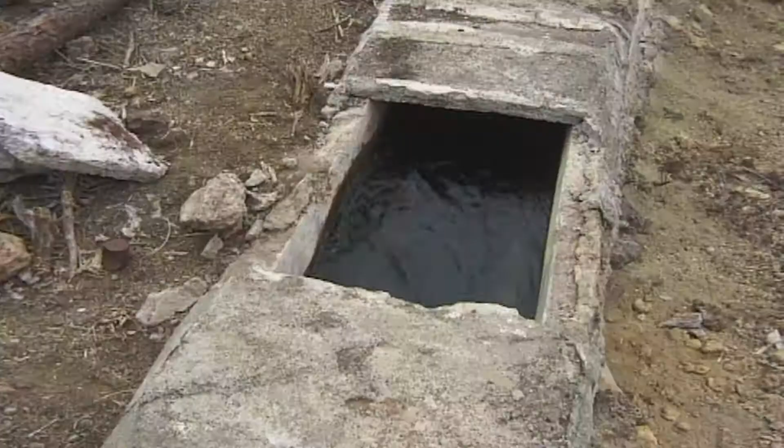Such transfers, necessary in order to guarantee the supply, have traditionally been accomplished via totally or partially covered channels. The risk entailed by this system has led the Island Water Board to foment the creation of a network specialised in the conveyance of urban water supplies, substituting the channels with closed conduits.

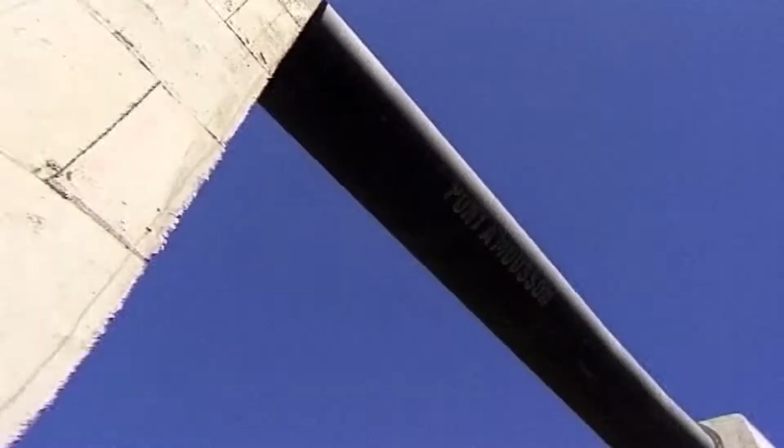The use of pipelines represents greater sanitary safety and, at the same time, allows the introduction of technical improvements such as remote monitoring and control.

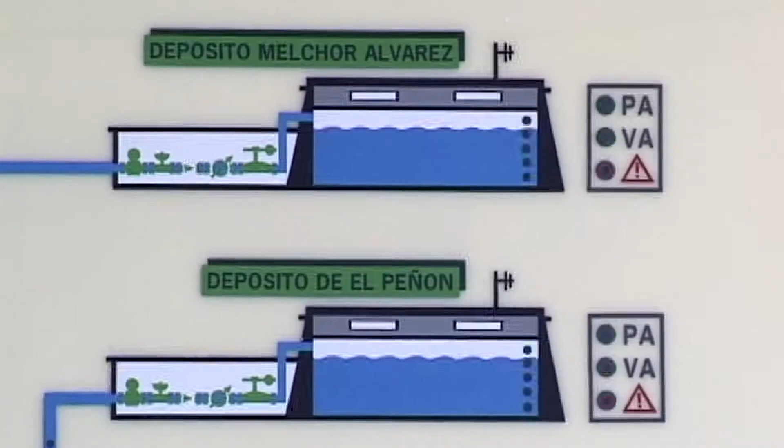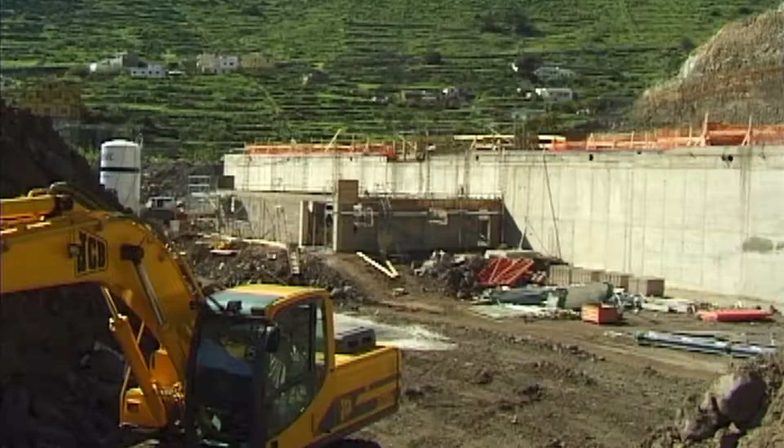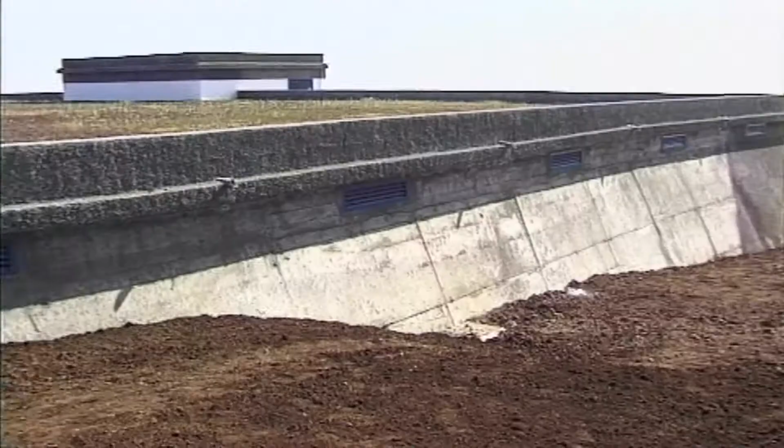The hydrological plan contemplates the construction of a sufficient number of holding reservoirs to guarantee the water supply to the population. They have been designed to hold 1 cubic metre per inhabitant so that, in the case of upstream interruption, a week's supply is assured. The reservoirs naturally have the control systems and devices for disinfection and ventilation that assure an adequate sanitary condition.

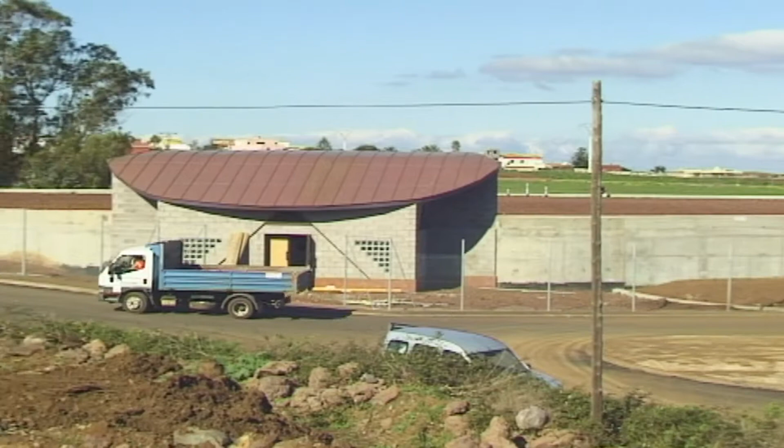The Island Water Board carries out studies on the management of supply in order to analyse the problems of the distribution network, put forward solutions that improve its efficiency, and offer the necessary tools for its correct exploitation.

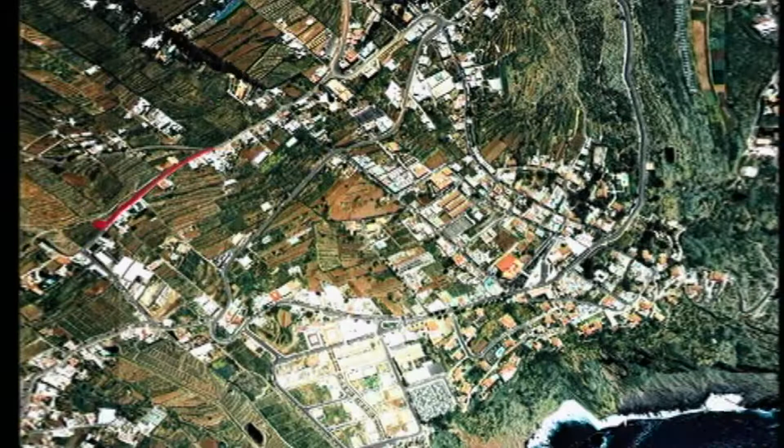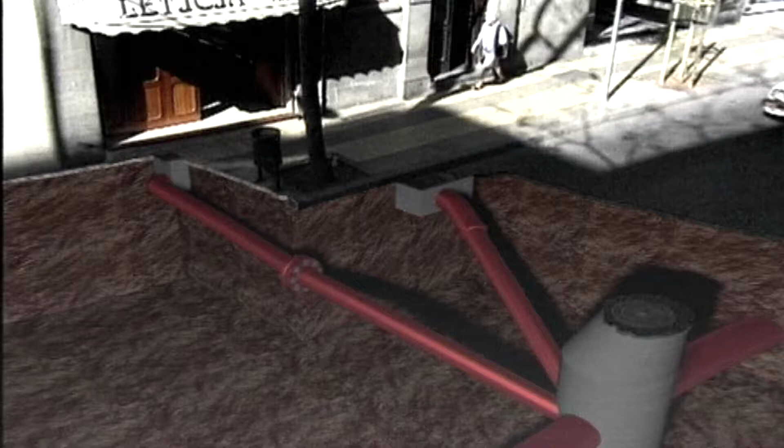The water reaches the end users via the distribution network. It is the town council's responsibility to guarantee an adequate flow and pressure, prevent leakage and ensure the supply to the user. Almost all the water used in households is returned to the sanitation network. It is advisable to have separate drainage for rainwater.

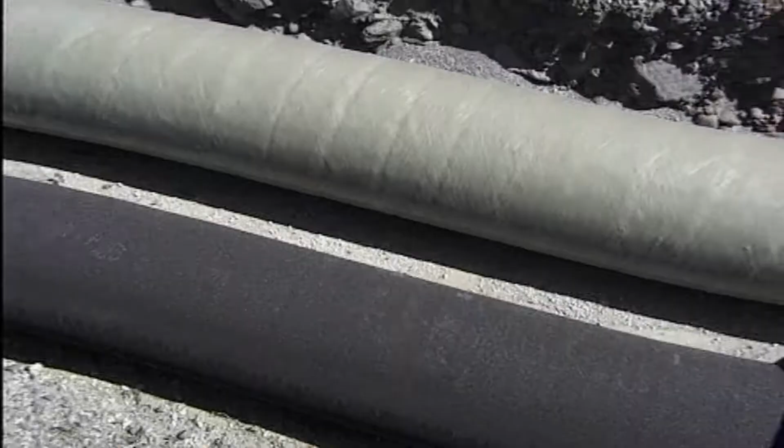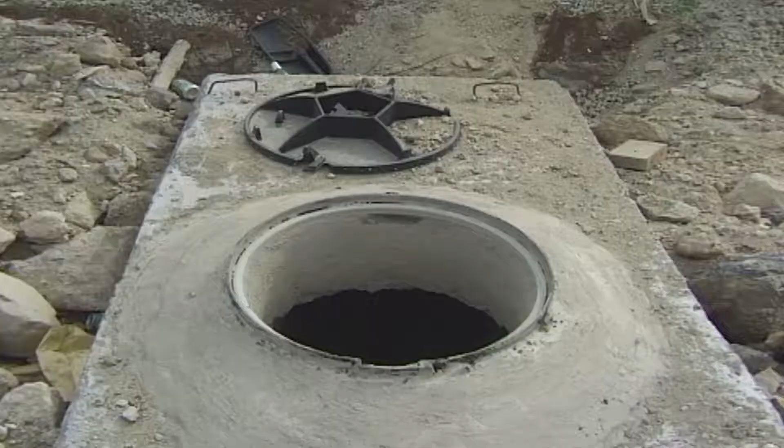In the year 2000, only 1/2 of the population of Tenerife was connected to a sanitation system. The reasons are to be found in the scattered population and the mountainous nature of the terrain. Since then, the Cabildo, in collaboration with the town councils, is executing a series of public works with the object of extending the sanitation network to almost 100% of the inhabitants by 2021.

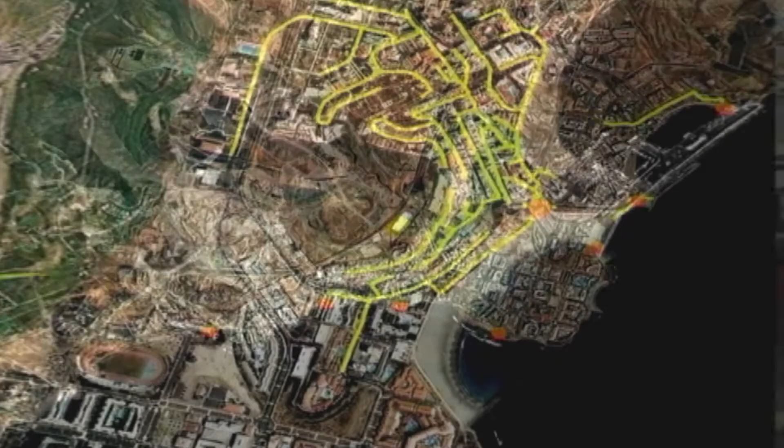By means of general collectors covering municipal or wider areas, the wastewaters are collected at certain points. This makes it possible to apply an economy of scale that reduces treatment costs.

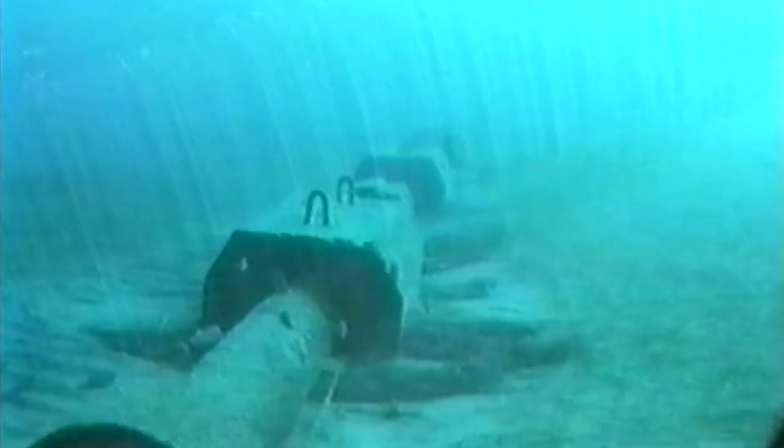The wastewaters are subjected to primary treatment that removes the larger agents of pollution such as silt, floating particles and greases. In accordance with the timetable of the European Directive, it is proposed that almost all the island's wastewaters receive physical and biological treatments. Once it is treated, the water can be reused in irrigation. When this is not feasible, underwater outlets discharge it into the sea.